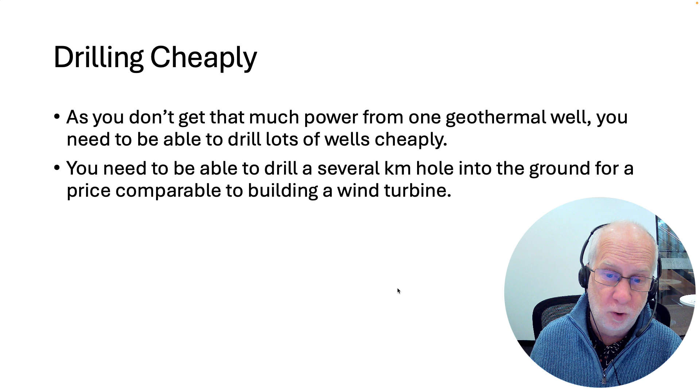So that's the challenge. You need to be able to drill a several kilometre deep hole in the ground for a price comparable to building a wind turbine. So let's think a bit about some of the challenges of drilling and how it can be made cheaper. So how do you actually drill a hole? Now remember, this is a technology that's been pioneered by the oil and gas industry, so people have been doing it for a very long time.

So in the olden days, what you'd do is, much like drilling a hole in the wall, you'd have a rotating drill bit on the end of a long tube, and you'd rotate it at the surface, and that would cause the whole thing to slowly grind its way into the ground. Now, that doesn't work when your drill becomes too long. It might work if you're going a few hundred meters down or even a kilometer, but by the time you're like 5 or 6 kilometers down, you can't rotate at the top to make the bottom drill. It twists the metal too much.

So typically you're going to have some sort of motor at the bottom, and you're going to have drill bits. Here are examples of drill bits which will grind the rock, and you'll normally be pumping a fluid down to carry the bits of rock away and then flow back up again. Now these drill bits are carefully designed. A lot of research has gone into the best possible shape for these drill bits to be able to work their way through the rock. It depends what sort of rock you're working through. They're often studded with artificial diamonds, but they do wear out fast.

And most drill bits so far have been designed for soft sedimentary rocks, drilling through like limestone or sandstone or shale, because those are the rocks where you typically find oil and gas. Whereas if you're going to do this anywhere in the world, you might want to drill through much harder rocks found in other places, like granite.

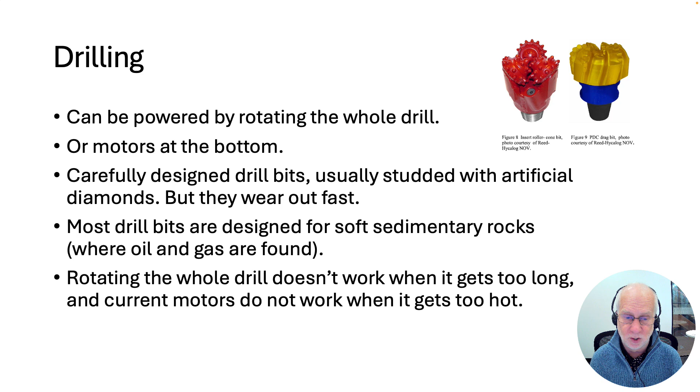Now, one problem is casings. As you drill the hole, there's always a chance that the outsides will collapse in on you. So what you'll typically do is put a casing, a steel cylinder, around the outside to stop the outside rocks collapsing in, and also to keep your fluid inside. Otherwise your fluid might escape out into the surrounding rocks, or fluid from the outside rocks might work its way into the tube and muck things up.

But as you go deeper, this becomes hard, because if you're going to put the casing down at 8 kilometers depth, you have to get that casing down there, which means you need wider casings further up. So for example here, they're talking about having a 21.6 centimeter open hole at 4 kilometers depth. And that means to slot that in, you're going to have a wider hole at 3.6 kilometers depth, a wider still one at 2.3 kilometers depth. So basically you have to drill a very wide hole at the surface so that you can slot the slightly thinner bit into the next bit, and then the thinner bit still for the next bit.

So if you're going deep, you're going to end up with, in this case, 91.4 centimeter casing at the top. That's nearly a meter across. That's huge. Which all costs money and time. And big drill bits, there's more to excavate. You're not talking about a narrow hole, you're talking about an enormous hole at the surface to get you a narrow hole at the bottom, simply because you've got to be able to fit each steel casing through the ones above it.

And also, if you've got fluids in the rock which have toxic chemicals in them, which is often the case, then you're going to need to make these casings out of expensive alloys of steel, not just your cheap steel, because otherwise it will corrode, and then you've dug this really expensive hole and the whole thing rusts through. That wouldn't be very good. So that's one reason why it becomes expensive.

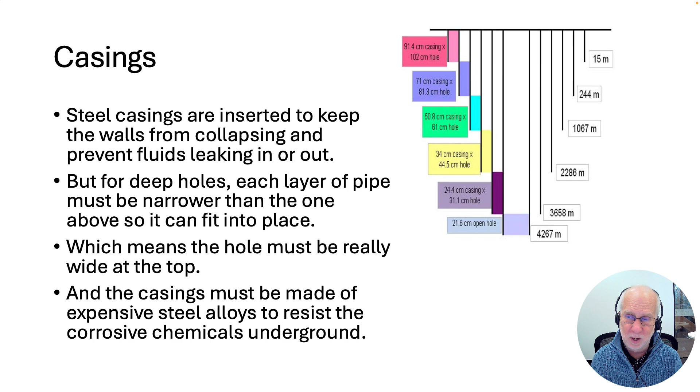Another very tricky thing when drilling any sort of hole is pressure balance. Now as you go deeper and deeper underground, the pressure goes up. Basically, if you go down in water, pressure goes up by about 1 atmosphere for every 10 meters you go down. And 1 atmosphere is 100,000 pascals, 100,000 newtons per square meter.

And the reason why pressure goes up as you go down is because something has to hold up all the water or the rock on top of you. So basically, the more dense it is, the more the pressure must go up as you go down. So what that means is even a few hundred meters down the pressure is enormous, and by the time you're kilometers down the pressure is just staggering.

I mean, a 10-kilometer hole, the pressure at the bottom would be the same as if you're in a submarine going to the bottom of the Marianas Trench, the bottom of the Pacific Ocean, which is a very dangerous thing to do. You can't send a person down there, the pressure would crush them in seconds, unless they're in some really strong submersible. So the hole can't just be full of air. If it is, the enormous pressure on the outside would definitely collapse it just like this.

What you have to do is make sure that inside your hole there is a fluid which is at roughly the same pressure as the rocks on the outside. Otherwise, lots of things, really bad things, can go wrong. This is actually one of the major dangers in drilling for oil. Let's say that you hit a cavity underground where the pressure is much higher than whatever water you've got in your tube. That pressure can then force this boiling water back up and spray boiling water all over everyone at the surface, which is very bad for your health, plus may destroy your drilling rig equipment.

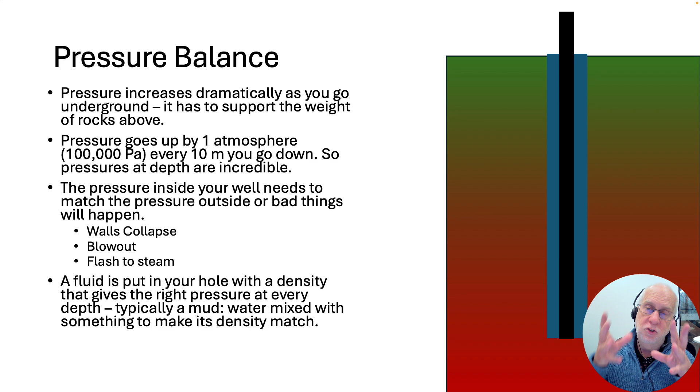What they normally do when drilling oil rigs is the fluid that's sent down, which is used to maintain the pressure, and also as it's pumped down allows you to carry the rocks that are being ground up at the bottom back up to the surface, is usually made of a mud, often a very special mud with rare elements and metals in it, to make sure the mud has the right density so that its pressure increases as you go down by the same rate as the rocks on the outside.

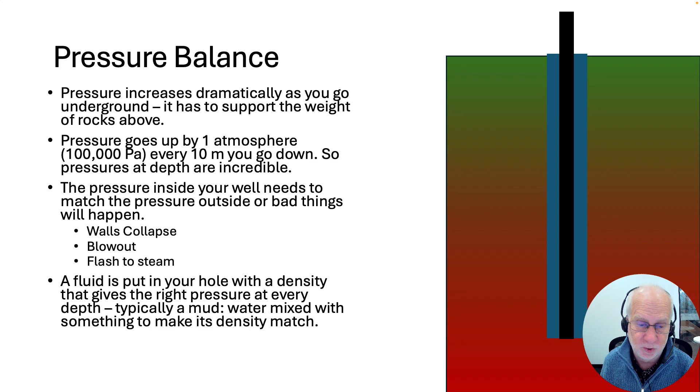And this is one of the most challenging things in drilling an oil rig, to make sure you've got the right mixture of mud at every point as you drill down to keep the pressure here and here and here and here roughly the same as the pressure on the outside, so your tube doesn't explode and you don't get boiling water squirted back up at you, or the whole tube doesn't collapse. So these all make drilling rather complicated.

One possible solution is to drill into hard so-called basement rocks. Almost everywhere on Earth, if you go deep enough, you get igneous rocks like granite. This is not where most drilling has been done so far, because most of that's been done in sedimentary basins to find oil and gas, but that's actually relatively rare in the world. Most places there's nice hard basement rock like granite.

And these rocks are hard enough that you may not actually need casings. They're strong enough and impermeable enough that your water probably won't leak out or in. You can just actually use the granite wall. Also, in these rocks, typically the pressure increases as you go down at about the same rate it does in a column of water. So you can just use water to drill rather than some exotic mud with metal elements put inside it.

So drilling granite might be quite easy. You might not have to worry about the casings. You might just be able to use water rather than exotic muds. But you're going to need really tough drill bits. And people haven't really researched the drill bits to drill through granite. Granite's a hard, abrasive rock.

Also, if you're going really deep, you're going to need drill motors that work at very high temperatures. Most of the existing motors are not designed to work at those sort of high temperatures. You either need to somehow cool the motor that's doing the grinding, or develop a motor that can work at temperatures of 200-300 degrees, and most current ones can't. There's no obvious reason why you cannot build motors that work at high temperatures. It's just not been needed so far.

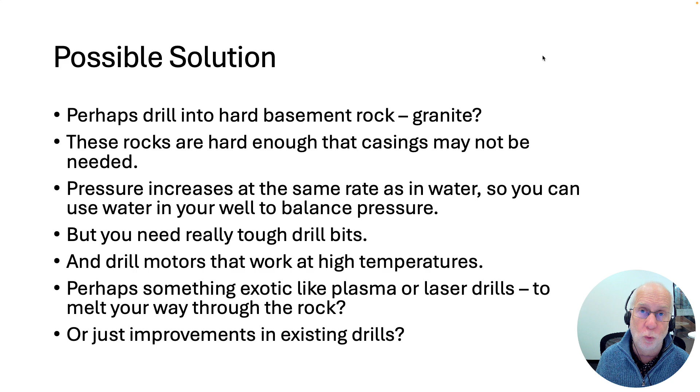So these are some of the research directions. Can we make better drill bits with motors that work at higher temperatures, or is something exotic going to be useful to drill these really deep holes? But it might well be that drilling into hard basement rock like granite is the way to go, which opens up far more of the world for this whole geothermal power.

So, where are we right now with geothermal? We know that except in places with hot volcanic springs near the surface, geothermal power is currently not cost competitive with any other form of power. So the hope is that by researching, for example, better drill bits and better ways of enhancing the heat flow and so on, we can bring the price of geothermal down to be more competitive.

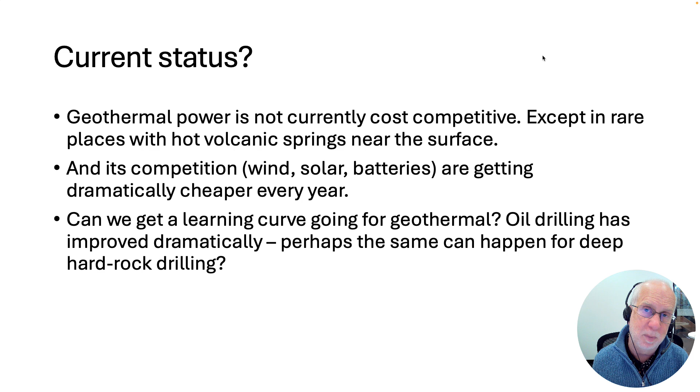The trouble is the price of the competition, wind, solar, batteries, is also getting dramatically cheaper every year. So it's not enough for geothermal to get cheaper. It has to get cheaper faster than its competitors. So the idea is we need to get a learning curve going for geothermal. Now this has already happened for a long time. People have got much better at drilling holes because of the oil and gas industry. So maybe some of those same techniques can be ported across to drilling into hard rock rather than soft sedimentary rock.

So what must happen? Right now, heat applications make more sense than electricity because the geothermal heat isn't very high temperature, so the efficiency of getting electricity out is quite low. So probably the sweet spot for this is things like district heating and industrial process heat.

Another possibility is you can put a deep geothermal well into, say, the ground underneath a disused coal plant. Because a lot of the expense of generating electricity is getting all the turbines. Right now, the turbines in coal-fired power plants are supplied steam by heating water by burning coal. But maybe you can drill a really deep hole and get the hot water from that to flash into steam, and that can drive the turbines, thus saving you the cost of building new turbines.

Because, of course, an advantage of geothermal is you can put one wherever you like, so why not put them where you already have a nice turbine that's going to get disused to repurpose it? And that could bring the price down because you don't have to pay for the turbine. So some combination of this, some combination of using it for heat, and some combination of maybe repurposing existing turbines might make geothermal power a bit more cost competitive.

And we're going to need something like this because for any learning curve you need to do a lot of it to get cheaper. So we need to find some way to make geothermal economically feasible, maybe just in special situations, and then use that practice from building these things to develop supply chains and develop the technology and bring the overall price down.

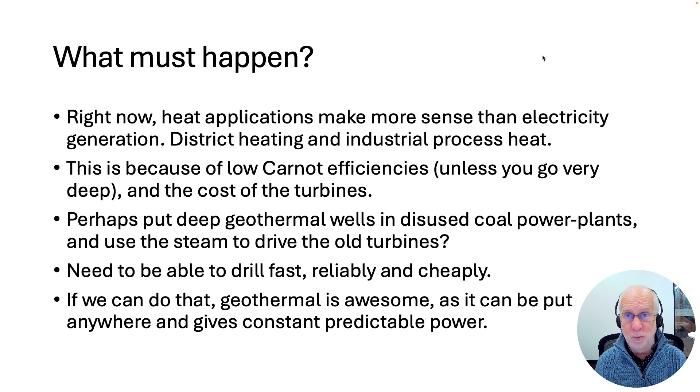I mean, if geothermal had started earlier than, for example, solar and wind, maybe that would be cheap now, and solar and wind, if they were using technology from 30 years ago, couldn't compete. But because solar and wind started decades ago, they've already driven the price way down, so it's hard for geothermal starting now to catch up. Historically, if it had been the other way around, maybe geothermal would be very cheap and solar and wind couldn't catch up. But that's not the way the history worked.